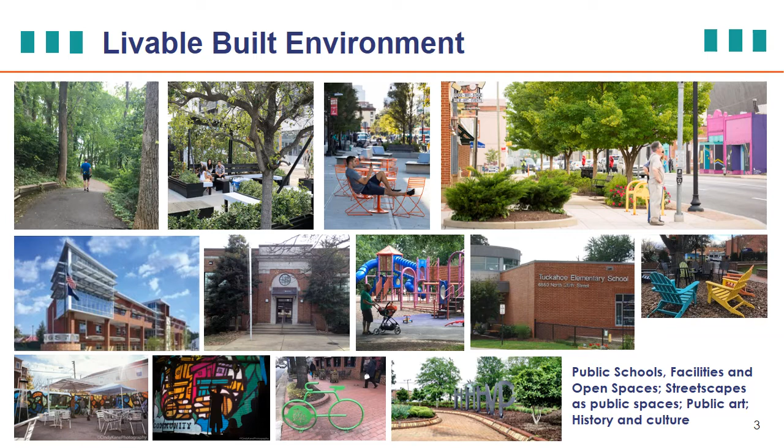There are 5 major redevelopment areas along the Lee Highway corridor. We're going to be focusing on Area 3 and 4 in this presentation, but it's helpful to see the broader context, where in Area 1 in the west and Area 5 in the east, the redevelopment potential is oriented towards the transit opportunities along the Orange and Silver Line, in East Falls Church and in Courthouse.

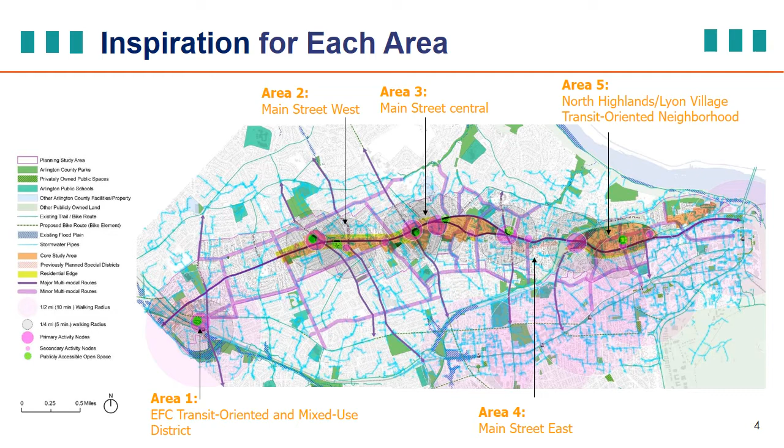In the middle of the Lee Highway corridor, there are 3 different Main Street areas: Main Street West in Area 2 near the Lee Harrison Shopping Center, and then Main Street Central and Main Street East in Area 3 and 4. This area in the middle of the corridor is where we hope to see the greatest transformation from a highway-oriented landscape and land use to more of a Main Street experience that's highly walkable, connecting mixed-use nodes at major intersections.

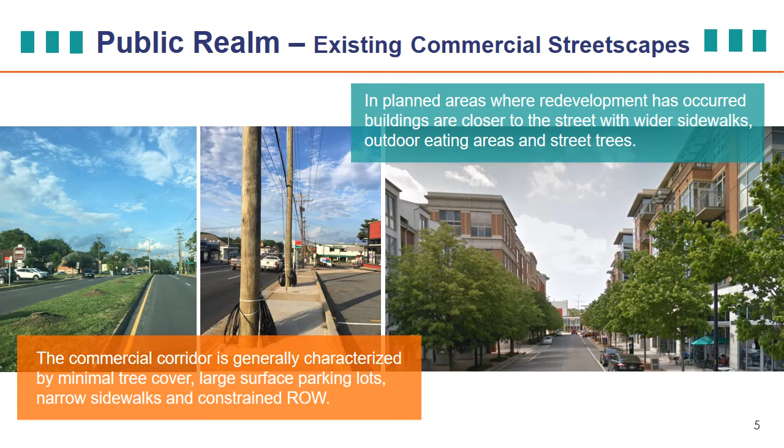So we're now going to zoom in and talk about Area 3 and then Area 4 in greater detail.

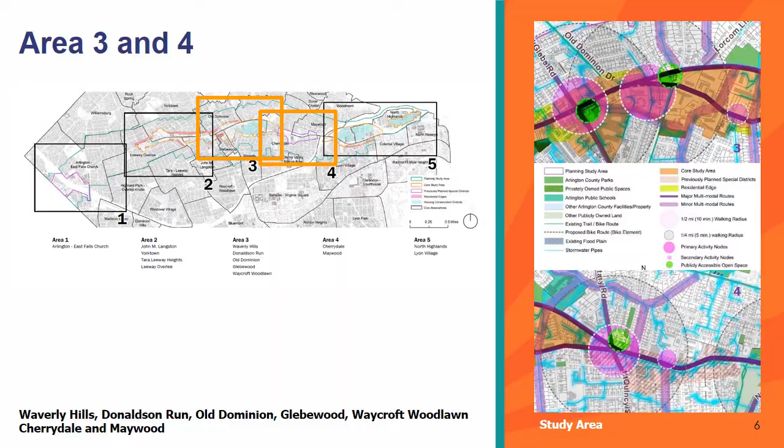Through our engagement with neighborhoods in Area 3, a number of key aspirations have come to the surface. First and foremost, the desire for more businesses with greater access to parking, and more mixed use at major intersections and along both sides of Lee Highway and Old Dominion Drive, west of North Woodstock Street.

There's also the desire to diversify housing types and increase density in the core areas and residential edges, including new opportunities for independent senior living.

The Lee Heights Shops is to continue to be the social hub of activity in this area and be complemented by new indoor and outdoor public gathering spaces and multi-use spaces in private buildings nearby.

Regarding the historic and cultural resources in the area, this is something that neighborhoods really wanted to highlight, both the buildings that are historic and the stories and events that happened at those sites nearby. The culture in the neighborhoods through art and tourism needs to be revealed as well.

People want to experience and expand the arts along the highway and the experience there. And the most distinctive attributes in their community by 2050, people want to see its mix of height and scales and architectural forms, and the integrated connection to nature through lush greenery, open spaces, and natural stream valleys.

There are a number of characteristics and planning influences in Area 3 that are shaping the way we think about scenarios going forward. From the standpoint of transportation, connectivity, and urban design, portions of Lee Highway here, especially west of Glebe Road, are some of the narrowest in right-of-way. Pedestrians feel unwelcome and vulnerable in many cases, especially crossing the streets and moving along the narrow sidewalks.

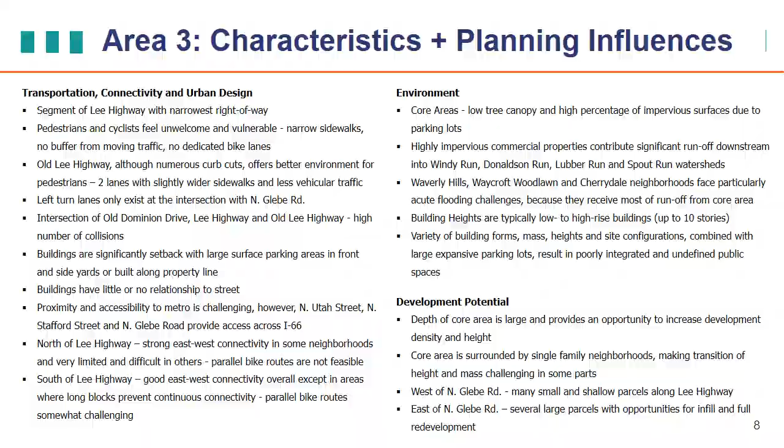The inspiration for the design concepts moving forward comes from our neighborhood inspiration report. Through those discussions with the community, it was very clear that the Lee Heights Shopping Center needed to become a stronger social and economic hub for the adjoining communities, and that this revitalized shopping center and surrounding commercial properties, with their signature Main Street and plazas, will be the main public gathering space for the communities.

This will be ringed by an urban neighborhood with a mix of low, middle, and high-rise buildings, similar to what exists today. The core area will be surrounded by its historic neighborhoods and will be characterized by the canopy of trees and lush green areas. These images highlight some of the experiences, scale transitions, and heights that would be talked about later on in the presentation.

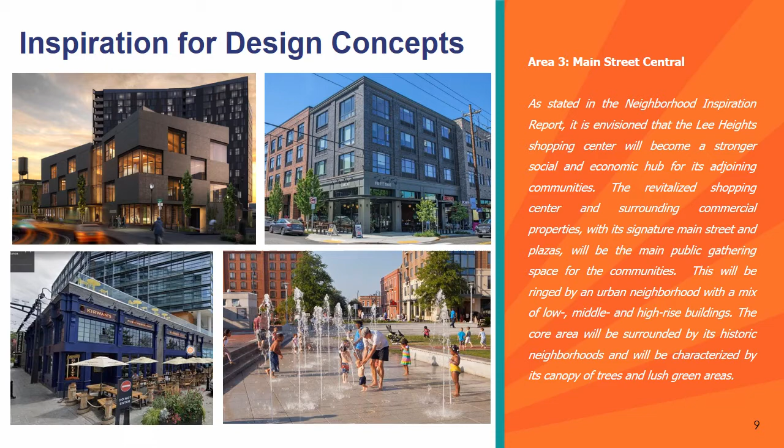We're also drawing inspiration from the visioning study ideas for this area. Some of those creative ideas looked at realigning the Old Dominion Drive intersection with Lee Highway so that people could cross more safely than they can today, and new development opportunities could be created. There were also ideas about how to locate new public gathering spaces near the Lee Heights shops and other commercial redevelopment areas. Some of those thoughts would require significant land acquisition.

So we want to adapt that intent into some locations that can be built in partnership with the private sector. There are also opportunities for that public space to help manage excess runoff and reduce downstream flood impacts.

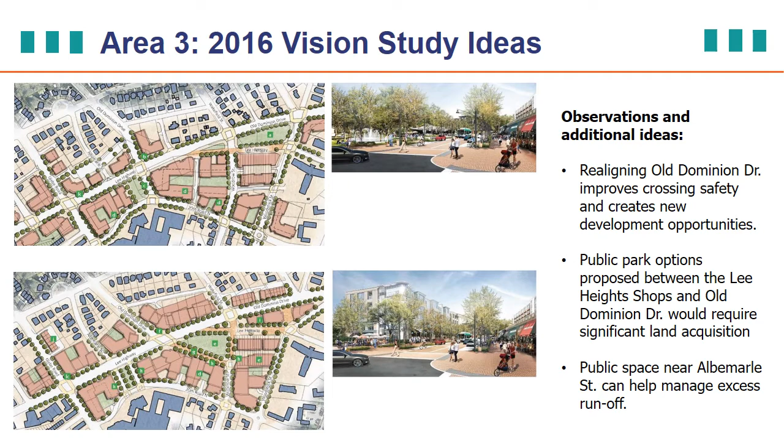At the Lee and Glebe intersection, there are a number of larger parcels or potential consolidation of parcels, where multiple pieces of property adjoining each other could be purchased together to create one larger parcel for redevelopment. There are many of those opportunities at that intersection, and it's also possible to create some new mixed-use development there of good density and scale that can step down and transition to the adjoining existing neighborhoods.

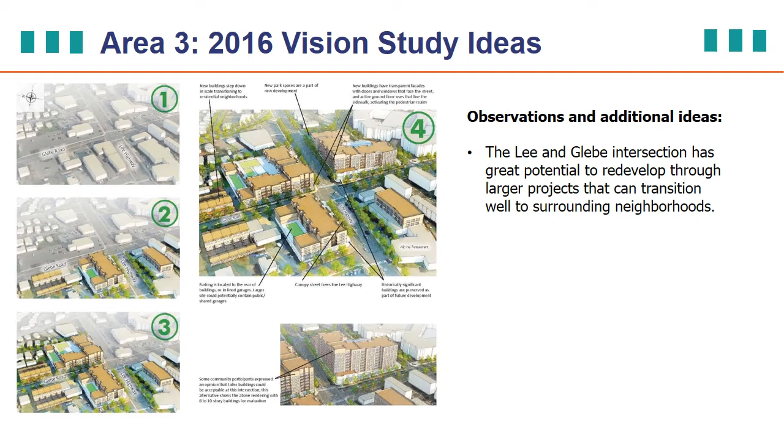The planning team has prepared a number of scenarios for Area 3. These scenarios are explorations of different ways of meeting Plan Lee Highway goals and the inspiration from the community. They're not intended to be options where you choose one or the other in its entirety. They're an exploration of different approaches.

The idea is to compare them, see which elements of each are most advantageous for the community, and then they will be assembled together in a hybrid idea called the conceptual master plan for the corridor. The scenarios shown here are not the only ideas that can be brought forward, but they can be used to help identify the best approaches for redevelopment and providing the amenities necessary in Area 3.

We start out with two different scenarios by sketching in different ideas for how the street network might change, where public spaces may go, and how new buildings and existing buildings could work together in the future. We're going to talk more about the land use, connectivity, and public space ideas embedded in each of these ideas, and we're going to talk about them in three distinct areas: west of Glebe Road, between Glebe Road and Lorcom Lane, and east of Lorcom Lane, as each of those locations is a bit different in its context.

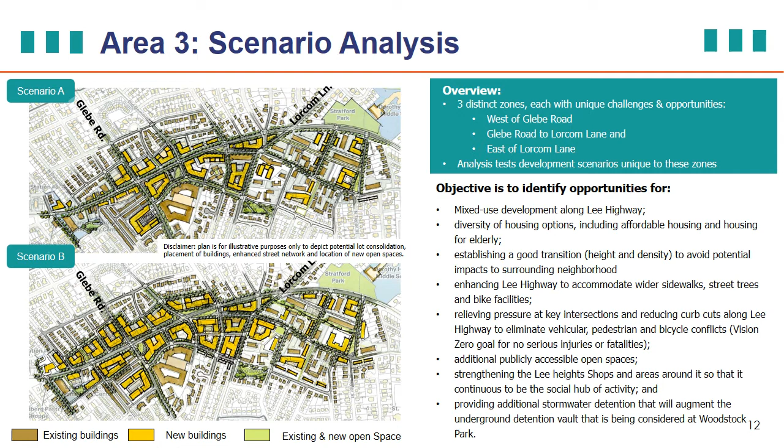These diagrams describe some of the land use concepts for each of the two scenarios, A and B. First, let's orient ourselves to the legend. The blue color highlights the publicly owned land or public facilities, mainly the Langston Brown Community Center and Fire Station 8. The green highlights the key open space ideas, either existing locations like Stratford Park and Woodstock Park, but also...

proposed open spaces that might be privately owned but would be publicly accessible. The yellow areas, shown mostly in scenario A, represent locations where the addition of two-family or low-scale multifamily structures could be added, either lot by lot or in a small grouping of lots incrementally over time into those residential edges.

Those would provide more transition housing types to add new capacity and new housing options for people in the residential edges, but in ways that are very complementary to the existing single-family homes. The slightly darker yellowy orange color, shown mostly east of Woodstock Street, is for moderately scaled multifamily residential. This is what is mostly on the ground there today, and the idea is greater infill between those existing buildings to create new housing capacity at similar scale.

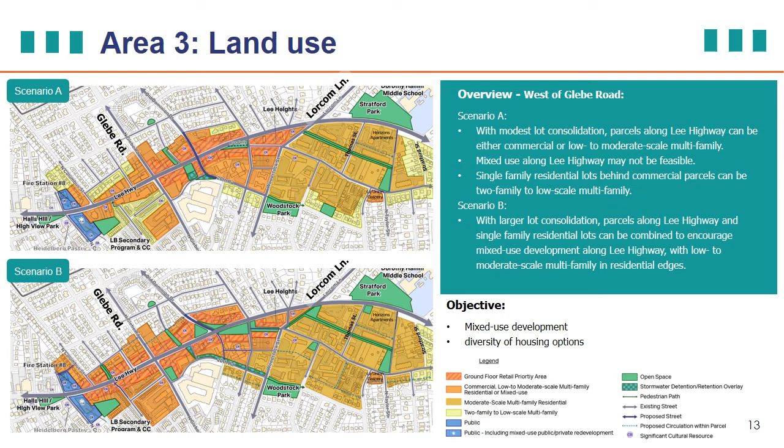In between Glebe Road and Lorcom Lane, the parcels along Lee Highway can either be mixed-use commercial and/or multifamily. The traditional mixed use, with commercial on the ground floor and residential above, is more feasible in this area because the parcels are larger, they're easier to access, and they should be encouraged around key intersections, yet required along specific streets or public spaces that define the center of activity for that node.

Along portions of 20th Road, scenario A proposes to convert single-family residential lots into two-family or low-scale multifamily areas over time. In scenario B, modestly scaled multifamily is proposed along those edges, a transition between the single-family neighborhood and the mixed-use development to the north.

But in each case, there's a strong focus on mixed-use development, creating a diversity of housing opportunities and reinforcing the retail frontage along Lee Highway, connecting from the Langston Center or Glebe Road eastward to the Lee Heights shops.

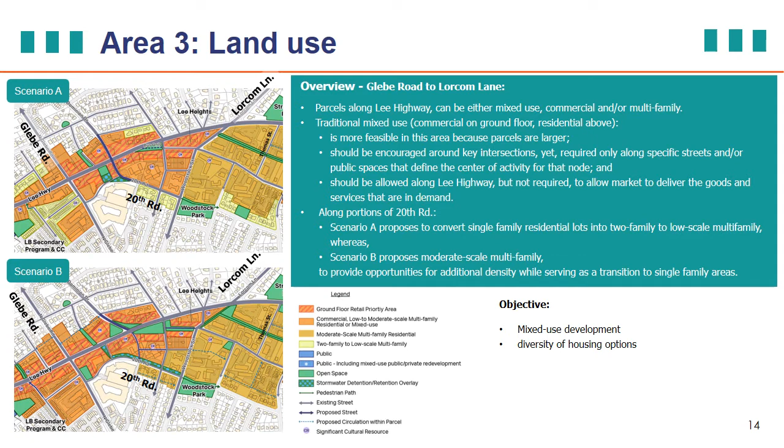East of Lorcom Lane and Woodstock Street, the land use aspirations are similar, and both scenarios propose infill development on the multifamily parcels with new moderate scale multifamily residential. There are a few locations near where the Union Grocery is today where mixed use development could serve local communities. One major difference is in how the edges are treated: along 20th Road south of Old Lee Highway, scenario A allows incrementally changing single family homes to two-family or low-scale multifamily, while scenario B imagines more lot consolidation, with those parcels becoming moderately scaled multifamily, with an appropriate transition in height across the street.

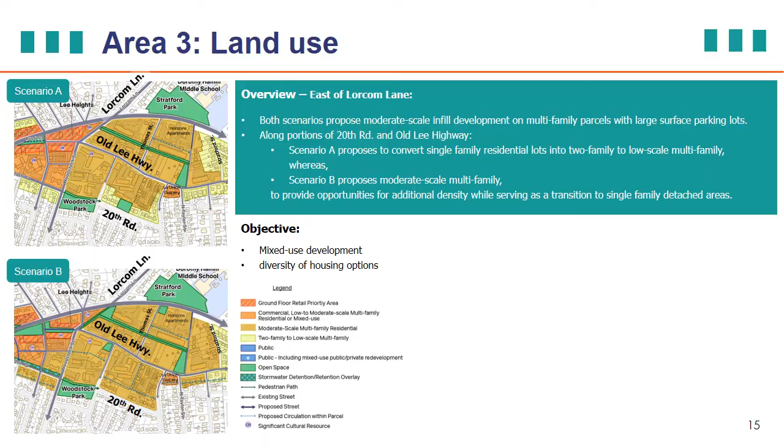It's also important to note that in the retail-ready streetscape, what we're calling the ground floor priority area, not every facade needs a storefront or traditional restaurant. It's possible to imagine other types of businesses that still engage with the street, are visually interesting, and relate to pedestrians. These can be active facades, even if those businesses are a little different.

Some examples include coffee roasting, where it's not just a coffee shop, but a place where the beans are actually roasted and produced. Or even urban farming ideas like Fresh Impact Farms along Lee Highway to the west. They could have an engaging relationship with the streetscape while producing local food.

Pet grooming and boarding is emerging as an important use, as well as co-working and even maker spaces where people can gather to pursue hobbies or entrepreneurial activities involving fabrication and specialized equipment. These are all neighborhood-oriented, neighborhood-friendly ways of utilizing ground floors in an activated way that can help make that walkable street possible and improve opportunities and amenities for local neighborhoods.

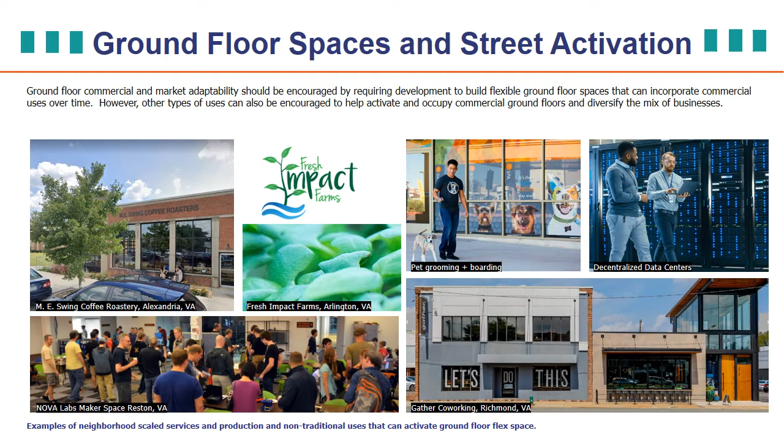In the area west of Glebe Road, we have an option to consider: redevelopment within the first half block compared to more consolidation that could include the first full block. This is similar to development found on Route 7 in the city of Falls Church, where on the left-hand image there's a hybrid idea where the redevelopment meets many of Plan Lee Highway's goals. In the first half block, there's a bank that still has a drive-through component at the ground floor, but now has residential above it. This is a step towards Main Street from Highway, but it's a bit of a hybrid.

On the right-hand image, farther down West Broad Street, there's an example where the development takes on the first full block and consolidates that property. What's built back there has a more continuous streetscape, more ground floor retail, and higher capacity for residential development above. There's also some publicly accessible open space built into this development, which then steps down to the blocks behind.

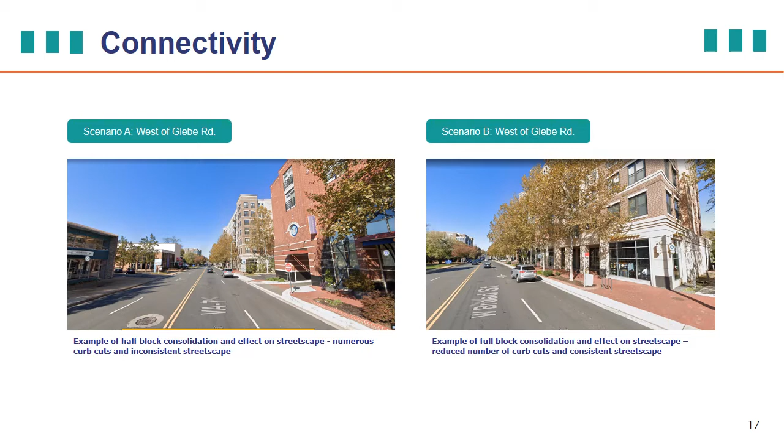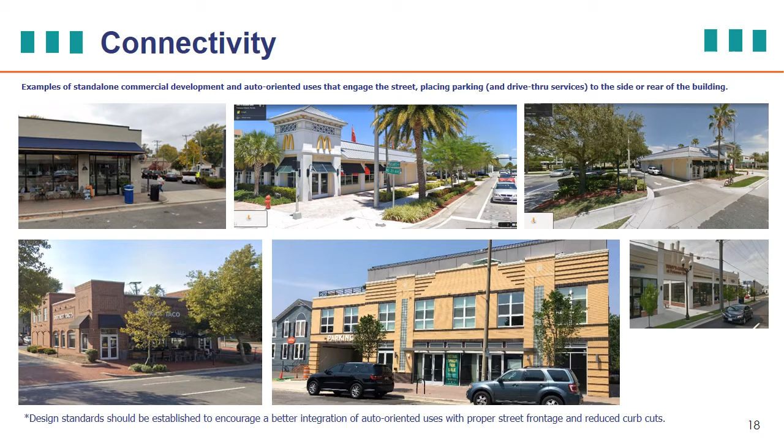It's also important to note that even if standalone commercial buildings are built along the corridor, through design standards their facades and streetscapes can be made more walkable, especially by placing the parking lots to the rear or to the side of those buildings.

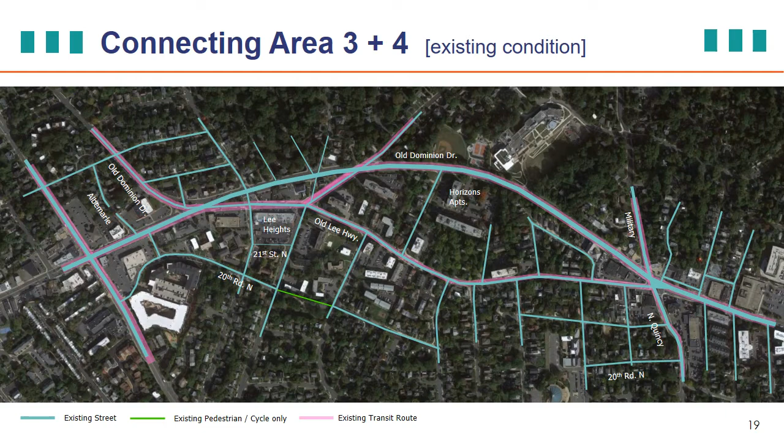This image highlights how some of the connectivity ideas in scenario A for Area 3 can connect to Area 4. Specifically, the biggest difference is where the intersection of Old Dominion Drive comes together with Lee Highway. In scenario A, that's proposed to bend to the south sooner and connect at a 90-degree angle with Lee Highway in order to create a much more Main Street-like intersection that's easier to cross and negotiate for all travel modes.

The idea is that street could continue southward as part of redevelopment of the adjoining parcels and connect into 20th Road North to provide access to new development and existing communities. At the same time, we want to make sure the area near the Lee Heights shops becomes even more walkable than it does today, and part of that is slowing the flow of vehicles that move across in front of Lee Heights shops. We'll talk more specifically about how to do that in a few slides.

You'll also see farther east that Taylor Street, to the east of Horizon Apartments, is proposed to be extended northwards to connect with Old Dominion Drive, providing another route for vehicles, transit, and pedestrians to connect between those two roads, providing access to new and existing development.

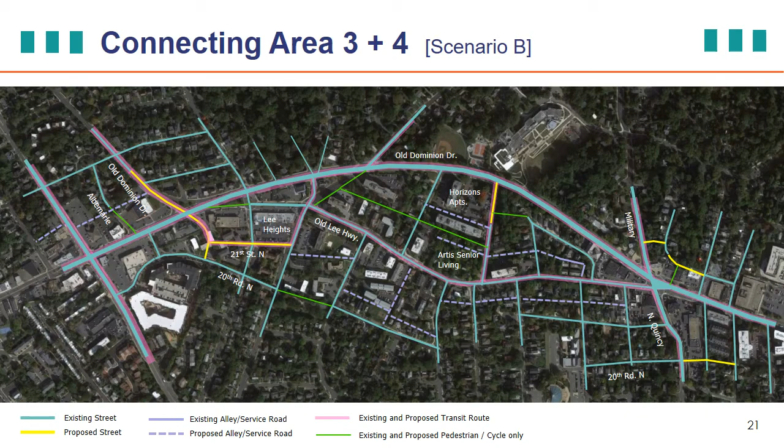We're now going to zoom in a bit and look at specific areas in scenario A and scenario B to better understand how the transportation and connectivity system might change.

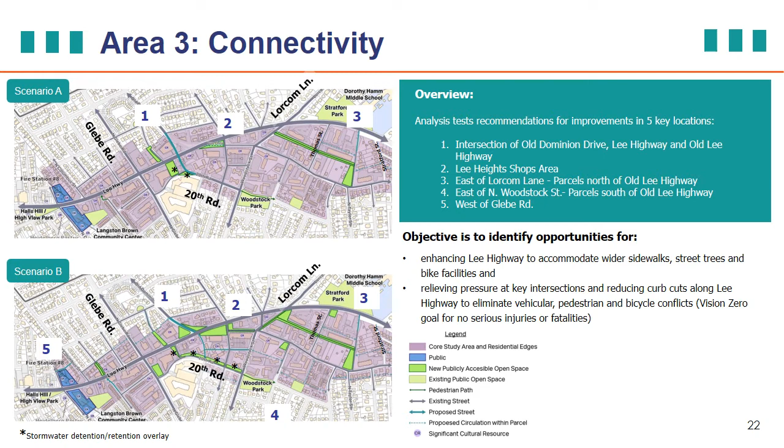In scenario A, again, Old Dominion Drive would connect southward to Old Lee Highway and meet at a 90-degree intersection that would be easier to cross for all pedestrians, cyclists, and motorists of different types, and connect through southward to 20th Road North.

That intersection would be easier to use than the current section of Albemarle Street south of Lee Highway. It would be better connected into the street grid, and so it could be swapped for that right-of-way to help make development on either side of that new segment of Old Dominion Drive happen in a coherent way.

In addition, the segment of Old Lee Highway that currently connects north of the Russell Building at the intersection west of Woodrow Street to Lee Highway would be converted into more of a public space.

Right now it is a place for vehicles to come through at relatively high speed. We want to calm that location by making it more of a public space, but still allow buses to come through in a calm way to keep the transit route in scenario A consistent with today.

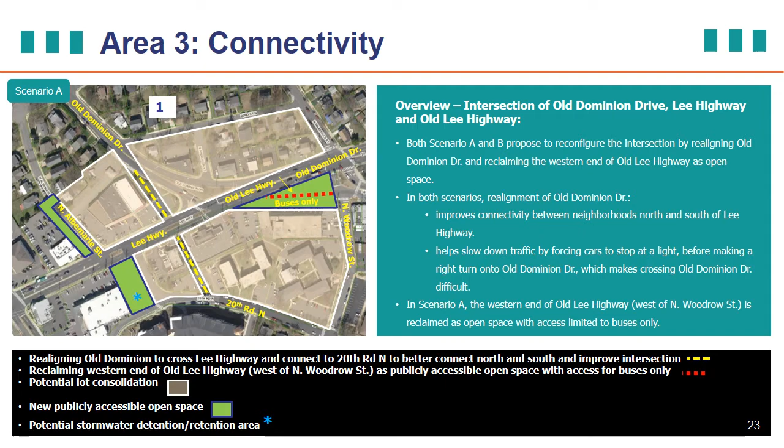This concept also allows for the segment of Lee Highway, Old Lee Highway, north of the Lee Heights shops to be narrowed slightly and to no longer include 4 lanes with major turning lanes, but to calm it down to 2 lanes, 1 in each direction, plus parallel parking opportunities on either side to access local businesses.

It's also important to still allow transit to come through this corridor. Part of what would make this possible is for traffic that is currently moving eastbound on Lee Highway, Route 29, that wants to go north on Lorcom Lane, that those turning lanes would remain on 29 instead of people having

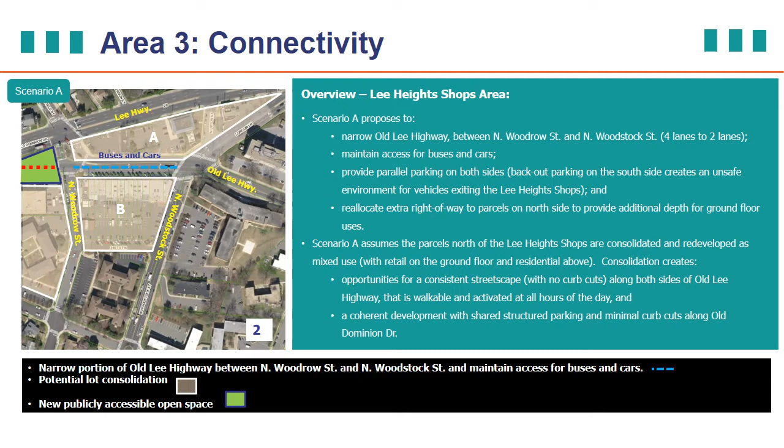to use this segment of Old Lee Highway in front of the shops to make that turn left onto Lorcom Lane. So we'd be simplifying the intersection there, keeping the higher volume traffic on 29 and calming the traffic along Old Lee Highway.

In scenario B, Old Dominion Drive would follow a similar alignment to what it follows today north of Old Lee Highway and Lee Highway itself, but then continue through on a new route that connects down to 20th Road. Again, the specific alignment in either of these scenarios is still to be determined and would need to be done in concert with the redevelopment of existing property.

In this case, 21st Street North would be extended from Woodrow Street in the east, extending westward 1 block in order to facilitate better access for transit and motorists of all types. These roadways would also serve that new consolidated redevelopment, so there could be less curb cuts on Lee Highway.

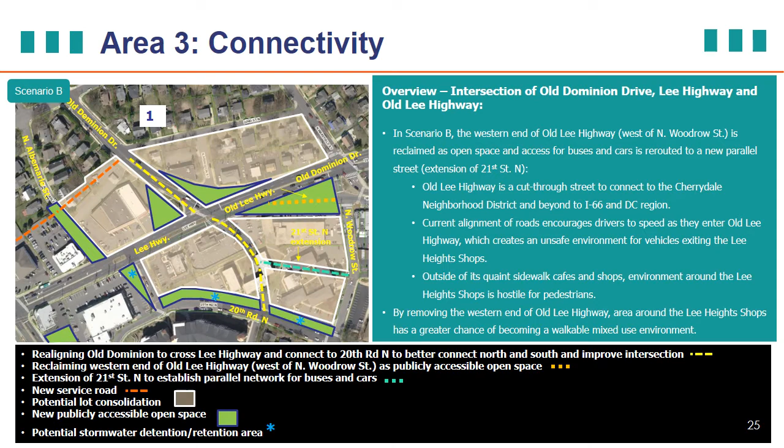Scenario B, with the new routing of Old Dominion Drive and 21st Street North, allows transit traffic to follow 21st Street and Woodstock to connect to eastbound Old Lee Highway. This allows the streetscape in front of the Lee Heights shops to the north to become a car-only streetscape and very pedestrianized, with the ability to be closed off at key moments to create a plaza that could host events and continue to be that social hub for the community.

In addition, there's the idea of Woodstock Street connecting northward through the Upham Street corridor to Old Dominion Drive, separate from the current intersection with Lorcom Lane.

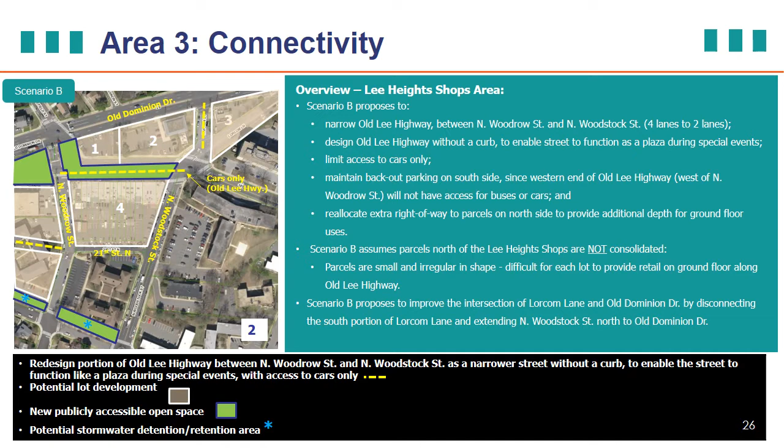In scenario A and B, east of Lorcom Lane, Taylor Street would be connected northward from where it ends today to connect to Old Dominion Drive, helping to complete the street grid better than it does exist today. Also, east-west connectivity for alleys and new streets near the Horizon Apartments, as well as pedestrian and bicycle greenways, could be connected to facilitate more options for connecting the community, both existing and proposed, to nearby amenities.

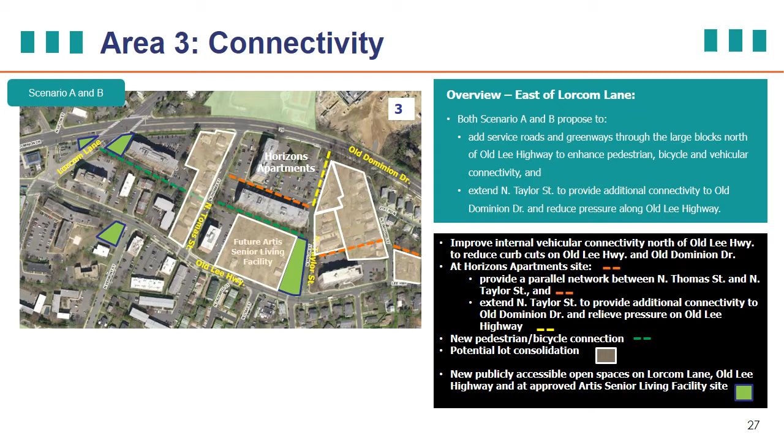South of Old Lee Highway, in scenario B, a number of alley connections could be created to help serve existing and proposed development and reduce the number of vehicular trips that need to be on Old Lee Highway, making it easier for pedestrians and cyclists to use that roadway.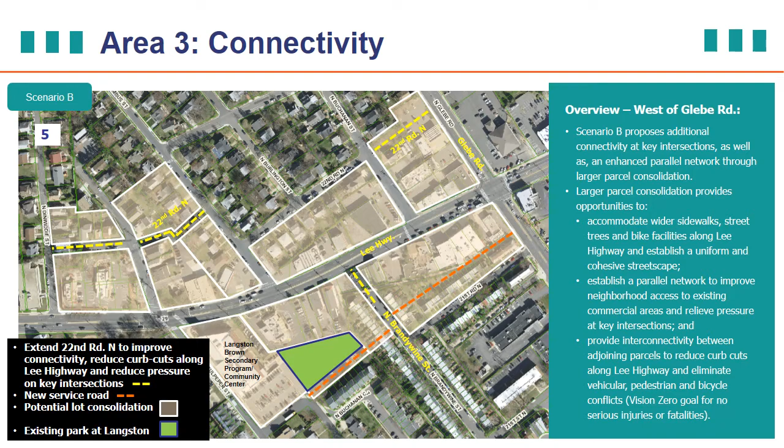The streetscape of Lee Highway needs to change in order to be more welcoming to pedestrians and accommodating to bicyclists and motorists and transit riders of all types.

The idea being considered at the moment transforms the streetscape by removing the center median, moving the curbs in slightly, providing one lane of travel in each direction to maintain flexibility for all the different modes we need, and then providing wider space for pedestrians and separated, protected bicycle lanes on either side, buffered from the streetscape. This would also happen in conjunction with street trees and new pedestrian level lighting.

These opportunities could also be built upon to add on-street parking if desired, or flex zones that can provide space for light pickup and drop off of deliveries or ride hailing.

It's important to note that where we have very narrow right-of-way along Lee Highway, it will take partnerships with landowners in the private sector to add additional space for pedestrians and cyclists on either side. But that partnership can result in better land value for those adjoining landowners and provide the much needed space to move all types of pedestrians, cyclists, and motorists safely.

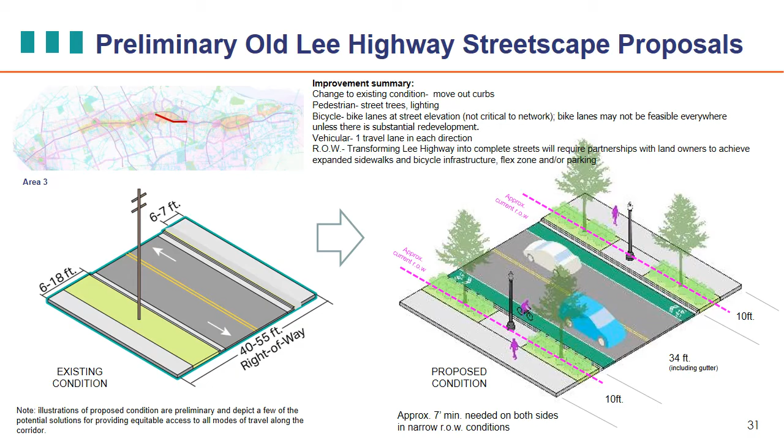In Scenario A, the new public space proposals are focused on the Albemarle Street corridor. This is because there's great potential to serve future redevelopment in the surrounding mixed-use node, but there's also the opportunity to capture additional stormwater that lands on all of the impervious surfaces surrounding this part of Lee Highway.

In this location, that water can be gathered along the Albemarle Street corridor and stored in vaults below the public space and let out at a reduced, slower pace into the stormwater management system. This reduces downstream flood risk currently felt by the Waverly Hills neighborhood, and it can work in conjunction with similar proposals within Woodstock Park to the east.

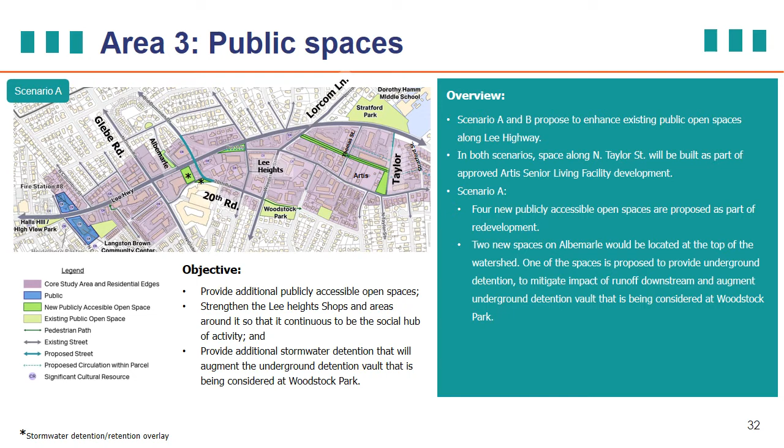There are, of course, additional public spaces proposed that can connect from east to west through the area east of Lorcom Lane, and also a signature public space west of the Lee Heights shops, where the corridor of Old Lee Highway connects to Route 29.

In Scenario B, the public space system is focused closer to Lee Highway, and it's more connective, bringing together the intersection of Old Dominion Drive, eastward across in front of the Lee Heights shops, along the previous Lorcom Lane right-of-way, and connecting eastward through the existing and proposed multifamily neighborhood.

There's also an additional linear public space that follows the Albemarle Street and 20th Road corridor. This public space also has the opportunity to connect adjoining neighborhoods as well as store excess stormwater runoff in a series of vaults below grade along 20th Road.

The comparison between Scenario A and Scenario B here has to do with the amount of public space. There is more of it shown in Scenario B, but it is more linear, connecting between neighborhoods than the centralized gathering space shown in Scenario A.

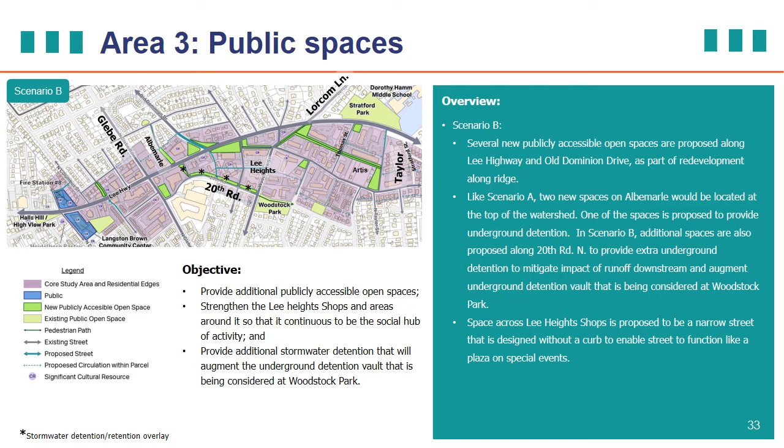Both scenarios help more effectively manage stormwater and reduce downstream flood impacts. These images highlight just two examples of public spaces that also help manage stormwater. These show locations where the water is visible at the surface. It's also possible to have that water stored below grade in vaults to allow for a more activated surface condition in those public spaces.

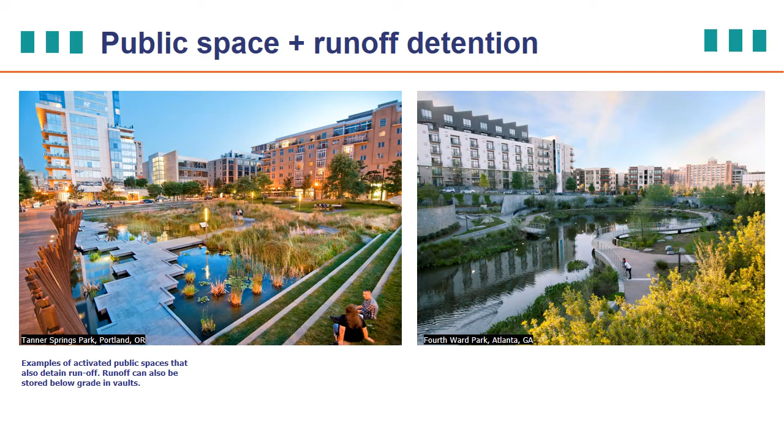We know that building heights are a very important and sensitive issue with the community, and they're an important part of the transition and the evolution of Lee Highway going forward. It's important to note that the recommendations being shown are allowances for potential future building heights that could be used as an incentive to work with the private sector to provide public improvements that are important to the community.

Today, the different commercial and multifamily zoning allow for heights between 4 and 6 stories, roughly 40 to 60 feet in height. Additional heights for properties along Lee Highway may be needed to accommodate parking and to encourage the improvements along the corridor we need.

It's also important to note that there will be additional consideration for historic structures and how they may affect the heights of buildings around them. And it's really important to focus on the idea that the maximum allowable building heights would not be granted automatically. They'd be subject to site plan processes and county board review and approval.

Also, to achieve those maximum allowable heights, there would have to be good transitions, both in height and density, between that new development and surrounding neighborhoods. That's very critical. The different ways that we can help manage those transitions can be through increased setbacks, using landscape buffers and trees and open spaces. We can use the alleys and service roads to make those transitions, and we can also taper down our building heights at the appropriate rate.

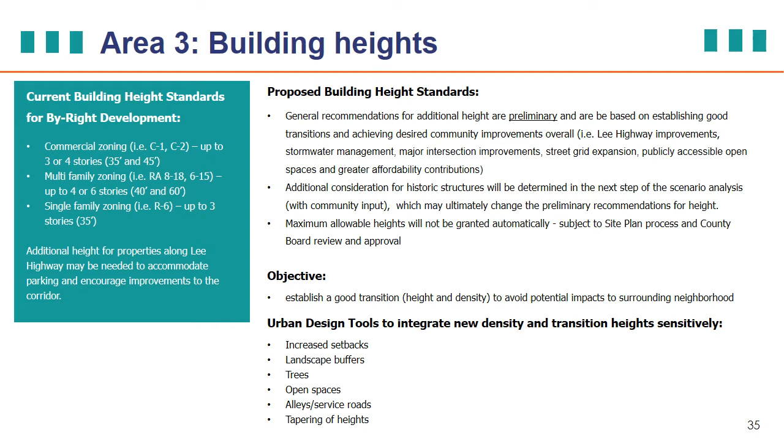These images highlight just two situations along Columbia Pike where building height transitions are managed in different ways. The top images show where a more modestly scaled multifamily and or mixed use building can transition to an adjoining existing single family neighborhood using an alley behind it and a landscape buffer in both conditions.

These may apply to conditions you see in scenario A, west of Glebe Road. The images on the lower part of the slide show conditions where along Lee Highway there can be new public space, more consolidated redevelopment that achieves taller heights with mixed-use development, but then steps down to that full block street to create a transition to single-family homes that uses something more like a townhome scale to make that transition along the street. So taller heights closer to Lee Highway where the public spaces are, stepping down to lower heights adjacent to existing communities.

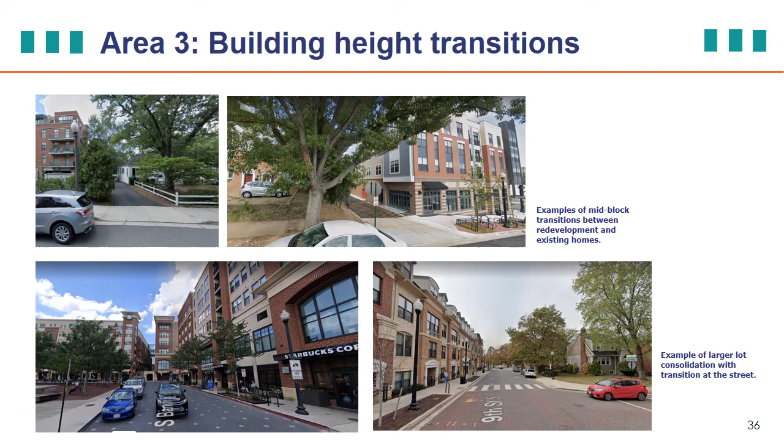It is important to note that those maximum allowable heights, again, would only be achieved through an incentive process that results in public improvements. Those public improvements could involve new streetscape enhancements, utility undergrounding, the provision of publicly accessible space, increased amounts of housing affordability, new sustainability benefits and carbon reduction attributes. There are a number of different public benefits and public improvements that could come out of the redevelopment at those maximum heights.

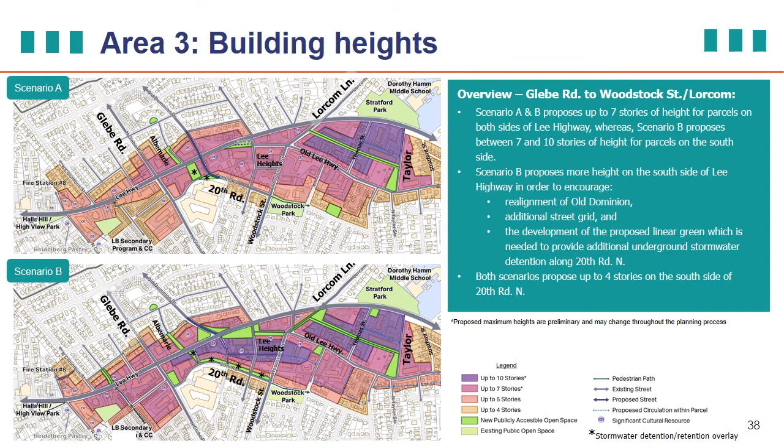East of Glebe Road, the alternatives vary as well. In scenario A, up to 7 stories is proposed between Woodstock Street and Glebe Road to facilitate new consolidation of land and to incentivize the types of public improvements that are being discussed.

In scenario B, there's a greater height shown along the southern side of Lee Highway, because there's also a greater amount of open space shown and more changes in the street grid that would require more space and cost. So in scenario B, a higher height allowance is given in order to provide those owners flexibility to consolidate their property and help provide those public improvements.

We know this is a sensitive issue with the community. What we're putting forward are ideas for consideration and discussion. Both scenarios can work to provide the improvements that are desirable, at different rates, and they can help achieve Plan Lee Highway goals. They're just different ways of approaching it, providing the owners of that land with different flexibility in achieving it.

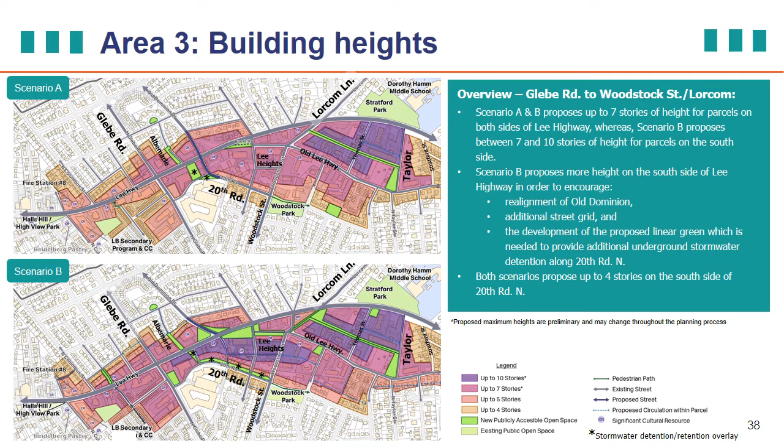East of Lorcom Lane, the two scenarios are relatively consistent, focusing on increased height in the northeast corner, again where existing buildings of similar height are today, and where that infill development is proposed to be at a similar scale.

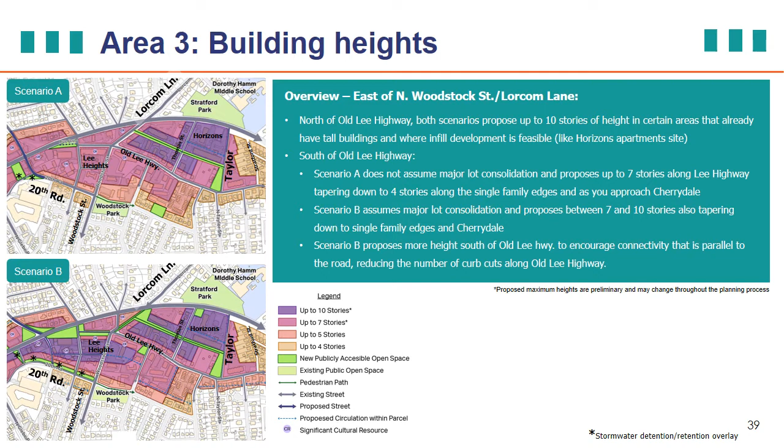As mentioned earlier, the Lee Heights shops are a very important part of the social life of Lee Highway today, and that is to continue in the future. Important there is the maintenance of legacy businesses and the way people engage with those businesses in the streetscape in front. One thing to consider is how new residences could be added near those shops, either above or slightly behind them, in order to provide more residents to patronize the shops in the future.

There will be an opportunity for you to register your thoughts on what the most important parts about the Lee Heights shops are, coming up online.

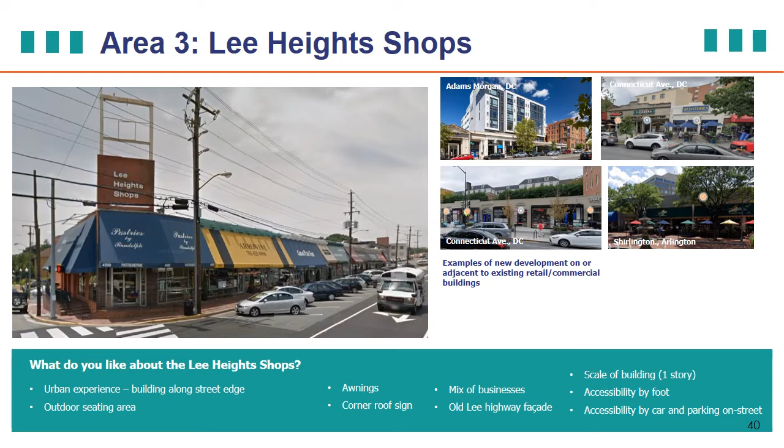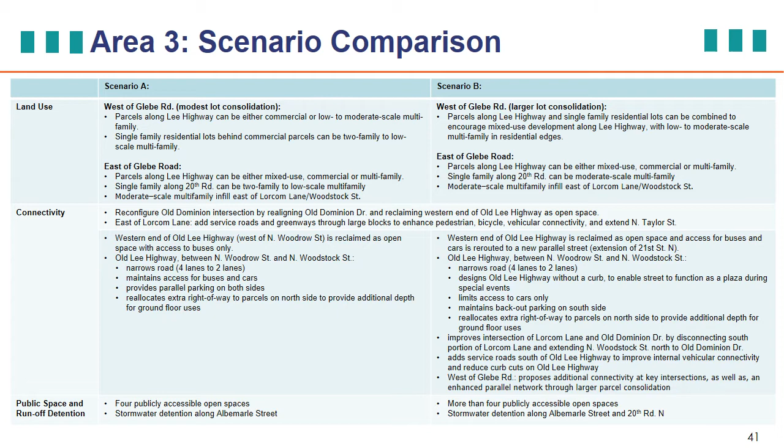We're now going to pivot to speak more about Area 4 and its aspirations. In Area 4, we're not focused as much on land use related recommendations, as the Cherrydale Revitalization Plan already describes the land use and mixed-use aspirations for the community. But we are very concerned about how the transportation, public space, and public facilities systems can be realigned to work better and help make that revitalization plan possible.

One of the key aspirations has to do with implementing that revitalization plan with multi-story, higher density, mixed-use buildings along Lee Highway, and incentivizing the production of affordable units in exchange for density. There are, of course, different viewpoints on the height of those new buildings and what may be appropriate. There was some support for additional mixed-use development in areas outside of the revitalization district boundary.

There's support for public parking off-street as well as on-street along Lee Highway to support existing and new businesses, and for increasing residential density as well—expanding commercial zoning for many of the parcels along Lee Highway, which are quite shallow, to support more local businesses in the area.

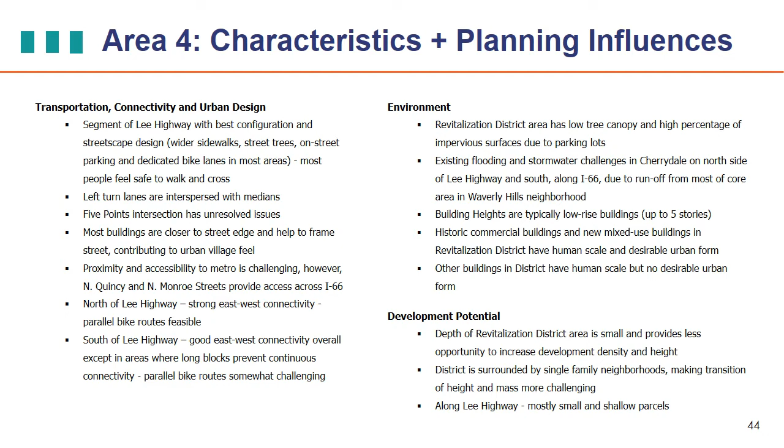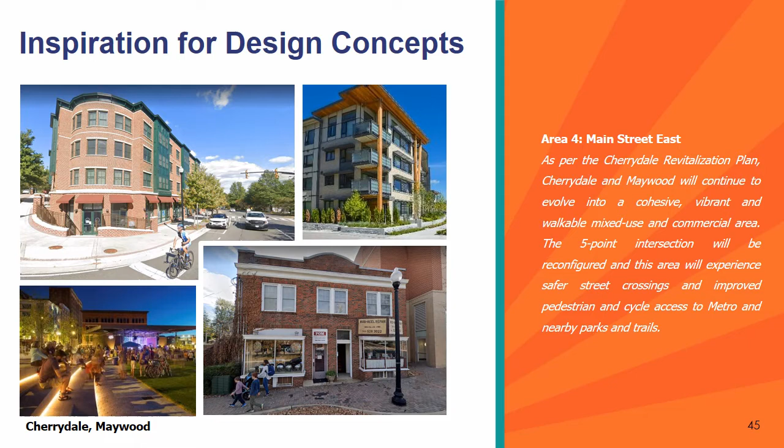So again, the desire and the inspiration for this portion of the corridor is as per the Cherrydale Revitalization Plan, that Cherrydale and Maywood would continue to evolve into a cohesive, vibrant, and walkable mixed-use and commercial area. That the 5-point intersection will be reconfigured and adjusted further in this area to experience a safer street crossing and improve pedestrian and cycle access to Metro and nearby parks and trails.

So we're able to go back and look at the ideas generated during the 2016 visioning study, where a few different thoughts about where to create public spaces in keeping with the intent of the revitalization plan, and how possibly to reconfigure the 5 Points intersection to help create some of that public space and improve traffic operations were considered. A number of dramatic ideas, actually, that in concert with redevelopment we want to learn from and build on.

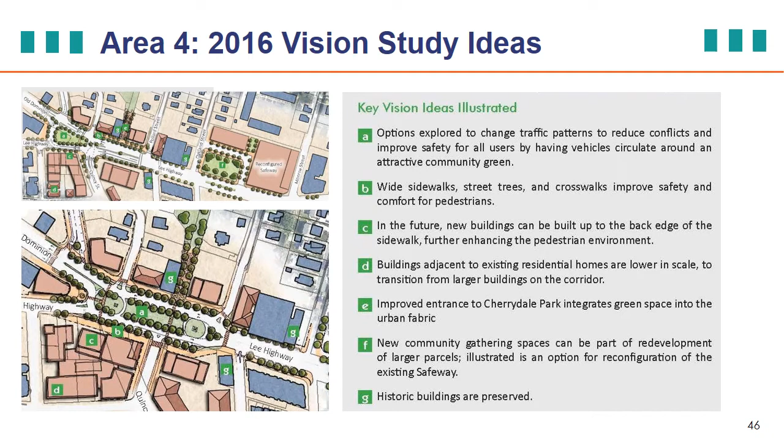Some of the challenges, though, with these ideas were that some of them really do start to encumber private land and take up quite a bit of what could be developable private sector opportunities. Also, the multimodal circulation through the 5 Points intersection could become circuitous and potentially create challenges for safely moving the current and future volume of pedestrian traffic, cycles, transit, and vehicles through there. So with those potential circuitous roundabouts and traffic circle-like ideas, there could be some unintended consequences that make it harder to move transit vehicles and other things through this location. So we want to be mindful of that as well.

So we've been thinking about the segment of Old Dominion Drive heading uphill west of Cherrydale and thinking about how that streetscape can become more calm, still move a variety of different transportation modes safely, but create some more space for pedestrian and cycle experiences.

The idea here is to actually remove that small center median, and with that space, move the northern curb line farther south, still provide 4 lanes of traffic, 2 in each direction. But that new space that we gather, we can create a new buffer for street trees and pedestrian level lighting, and a shared use path for pedestrians and cyclists going in both directions all along the northern side of the roadway, with just the need for a small additional corridor of space adjacent to the roadway.

And that would provide everyone to the west and the east better access to the school and the park space there, and improve bicycle connectivity up what otherwise would be a pretty steep climb on Old Lee Highway, or a potentially dangerous climb without those buffered facilities along Old Dominion Drive.

And of course, there's the opportunity to imagine expanding the bus system to include bus and HOV priority at peak times in that outer lane, similar to what's being piloted to the east in Area 5. The idea is to continue that operation at peak times in a managed lane on the edges here in that outer lane to improve transit access and performance.

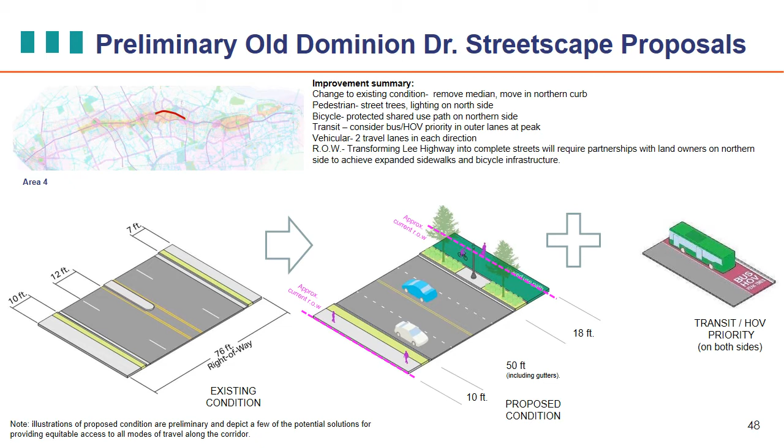As mentioned earlier, within Cherrydale itself we already have a model streetscape for walkability in many ways, but there are still some enhancements that can be made. West of North Monroe Street, the median could be removed in order to provide space for a westbound bike lane protected on the northern side of the corridor, possible with just a slight change in the curb line.

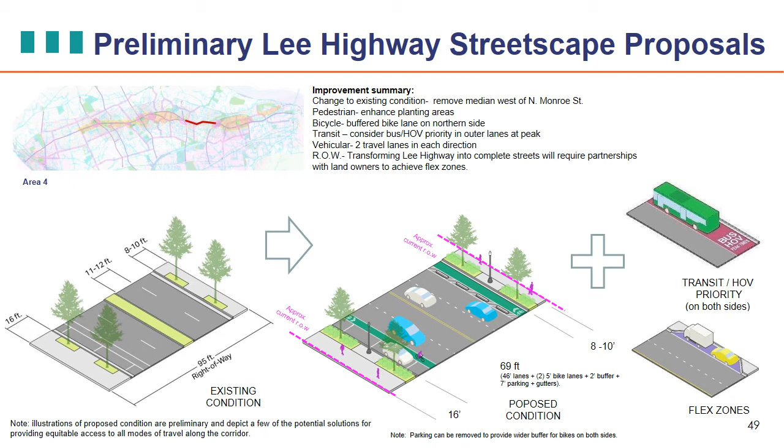This diagram highlights a number of different ideas simultaneously. It highlights key locations for potential public spaces that could be created over time in concert with adjoining private development. It shows where that area of change might be in light purple, where the prime locations for consolidation of property and redevelopment for mixed-use purposes could be. The red and blue dots each highlight whether that block is inside the revitalization district boundary or whether it is only the commercial sites within that district boundary.

There's a highlighted line in greenish blue for where potential new streets could be created to help better connect the neighborhoods surrounding the main portion of Lee Highway. Specifically, you can see on the northern side, connecting behind the Safeway, and then along in parallel to Lee Highway, connecting westward across Pollard towards North Quebec Street.

There could be a new parallel street built as part of consolidation and redevelopment of those properties along Lee Highway. And then there's also the opportunity to extend 20th Road North south of Lee Highway eastward towards North Oakland Street through the Brown's Honda site if it's redeveloped, connecting through corridors to North Oakland Street.

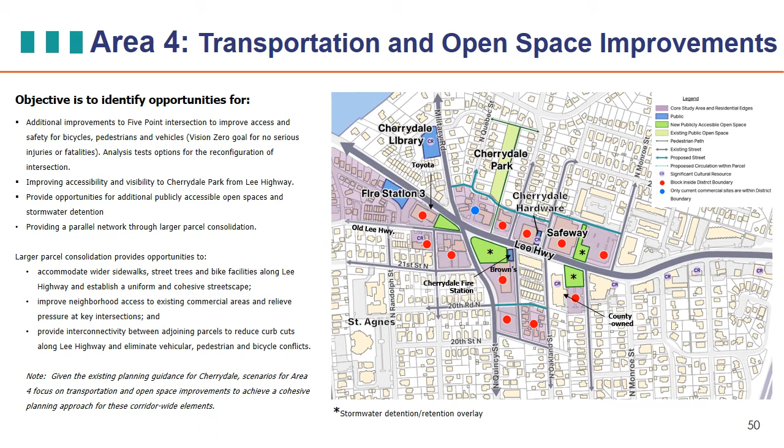Zooming into the Five Points intersection itself, the goal here is to make some modest changes that can have a big improvement and to avoid encumbering public property or private property with those public rights of way.

First and foremost, the main area of intervention is in the northeastern corner of Military Road and Route 29 where they come together. Again, with that parallel network of streets being possible through redevelopment of the parcels along Lee Highway, that could reduce the need to bring North Quebec Street out to the Five Points intersection.

So if that segment of North Quebec Street is removed, and the frontage road that parallels Route 29 connecting to it is removed, that public right-of-way can be returned to landowners to be developed. That would remove one of the points in the intersection, remove some of the decisions that need to be made, and create a more continuous, more walkable pedestrian streetscape connection there. By removing some of those decision-making points, it simplifies turning movements and the flow of vehicles through the intersection.

In addition, there are thoughts about how over time the corner of the Koons Toyota site could become more of a public space that facilitates easier access for pedestrians moving north-south as well as east-west. You'll also see a greenway connection that can act as an extension of Cherrydale Park, bringing it out to Lee Highway as part of that redevelopment on the northeastern side.

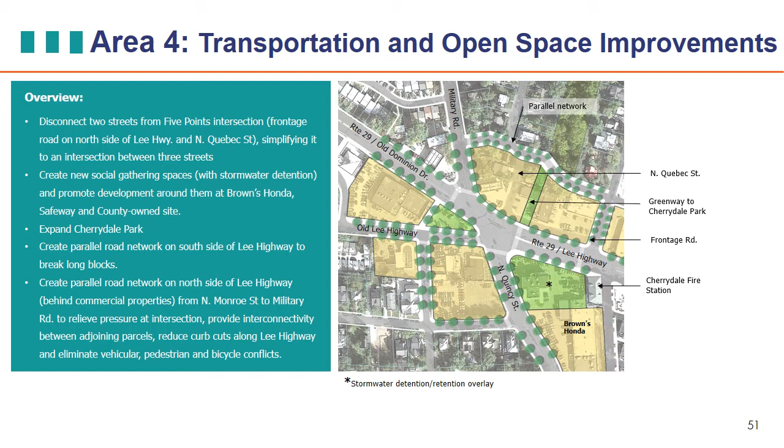So as we think about the redevelopment along Lee Highway to help meet the goals of the Cherrydale Revitalization Plan, the planning team's assessment of the transportation and open space improvements, thinking about the ways that implementation might be happening, will also be considered.

That could include reevaluating the existing planning guidance for specific areas and the adjacent properties where those improvements are identified. For example, recommendations for an additional story of height may be considered for C2 properties where the new development can establish good transitions, achieve desired community improvements, and support the underlying goals of the revitalization plan, meaning a maximum allowable height of 7 stories total.

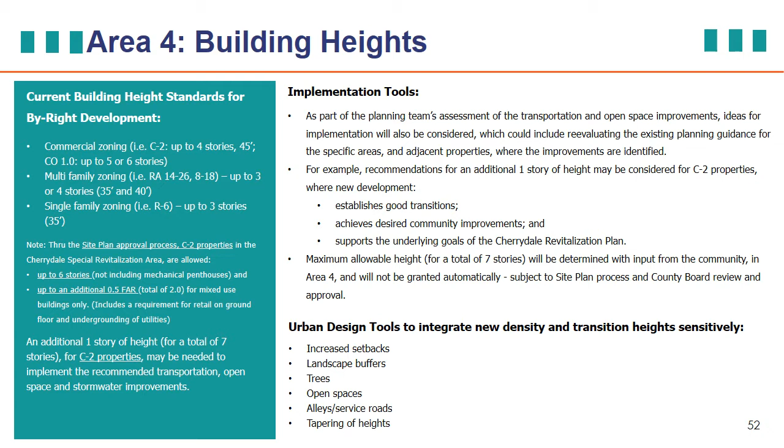That could be determined with input from the community in Area 4, and it would not be granted automatically. It would be subject to a site plan process and county board review and approval. But if it does make those transitions happen well, it can be an extra tool to help accelerate implementation of the creation of these public spaces and new mixed-use development.

So as we look forward to implementation in both Area 3 and Area 4, there are going to be a number of trade-offs to consider. First of all, a certain level of base development that can be built around private investment and contributions to a site's improvements, and some affordability, is the baseline idea.

But then we want to consider additional incentives, like more height or density, that could spur additional community improvements from that private investment in key locations. Those investments could include improving Lee Highway itself, improved stormwater management and sustainability outcomes, creating publicly accessible open spaces, major intersection improvements, street grid expansion, and greater affordability contributions within each of these projects, although we'd anticipate the county needing to invest in larger stormwater, transportation, and infrastructure improvements overall.

But to get there, we have to consider different trade-offs. Building height is one of them, where in order to allow economically viable development and desired public improvements simultaneously, we might need a little more height to make that possible.

In other cases, the extent of change horizontally is the trade-off. Do you just redevelop within the core, or do you also redevelop the single-family edges nearby? At the edge, do you integrate new transitioning housing types incrementally, or do you imagine more redevelopment through consolidation of the property?

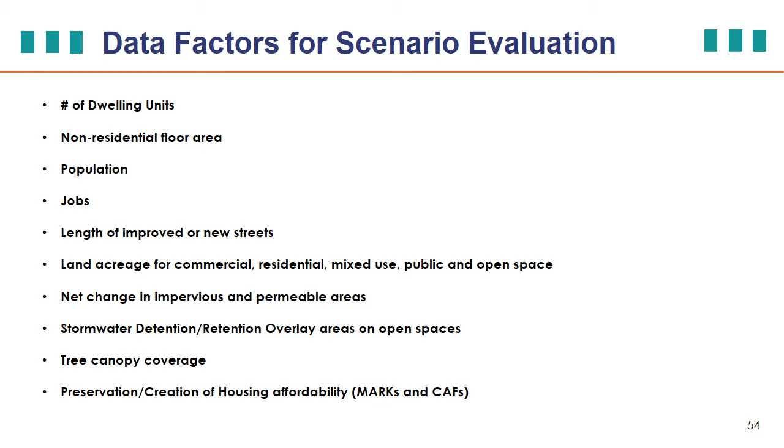And as we move forward in the next steps of developing that preliminary concept plan, we'll be coordinating with a number of different entities to address key outstanding topics. For example, from a mobility standpoint, we'll be modeling the transportation benefits and challenges and coordinating further with VDOT. We will also be looking at schools and coordinating with APS to evaluate changes in student enrollment and identify future school models that may be necessary in key locations.

We'll be clarifying the preferred concept for public properties and identifying future opportunities for public-private partnerships if new facilities are needed, including clarifying future library concepts, like that Cherrydale Library. Where's the best place to have it? Is it better to bring it closer to Lee Highway? That's the kind of thing we'll think about there. And then, of course, we'll identify options for providing core support services on public land.

We'll work with DPR to differentiate the use and character of our open spaces within any key proposed open spaces. And then we will evaluate the achievement of the Affordable Housing Master Plan goal of 2,500 units and target the best ways to try and meet that goal and address the related trade-offs going forward.

And from a cultural resources standpoint, we'll describe a framework for varying levels of preservation and interpretation along the corridor for those key properties, based on the significant stories, people, and events, and the eclectic architecture of Lee Highway going forward.